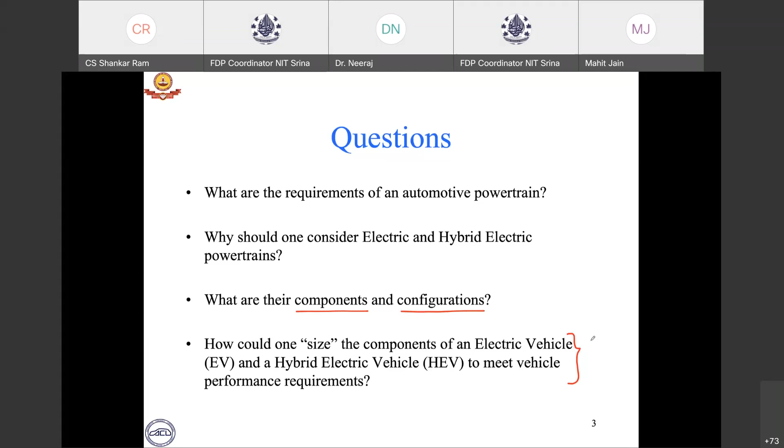So let's answer each question one by one, starting with what are the requirements of an automotive powertrain from a vehicle performance perspective. Many times, we encounter that when we have a vehicle, it goes from, let's say, 0 to 60 kilometers per hour in 4 seconds.

So please excuse my handwriting. I'm writing with a mouse. So please excuse if some words appear awkward.

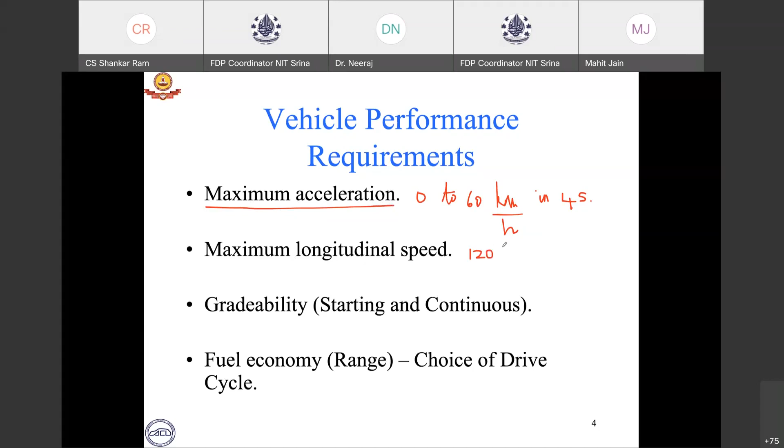So let's say we specify or we encounter that a vehicle goes from 0 to 60 kilometers per hour in 4 seconds. That means that we are specifying what is the intended acceleration of that. And one can also specify what is the peak longitudinal speed at which the vehicle should travel. So for example, one may say, I want the vehicle to travel at a maximum vehicle speed of 120 kilometers per hour. So that way I am putting a number to this requirement.

And we can also specify what is called gradability. I'm sure all of us would have driven on uphill roads, particularly if you consider NIT Srinagar, we will have a lot of hilly terrain in and around Srinagar. So then the question becomes, if I have to go up an upslope with an angle of theta, what effort should I put in to climb this slope? And that is quantified by what is called gradability. So gradability is typically tan of this theta, tan of this angle which I want to climb.

Of course, if we go in depth into this, we'll see that there is what is called starting gradability and continuous gradability. So what are they? If I look at continuous gradability, imagine that we are driving a car or a two-wheeler on a flat road, and I approach a hilly terrain or a flyover. I continue to go at the same speed on the flyover or the hilly terrain. So then I should put in some more effort or thrust to continue to go at that same speed. So that is what is called the continuous gradability requirement.

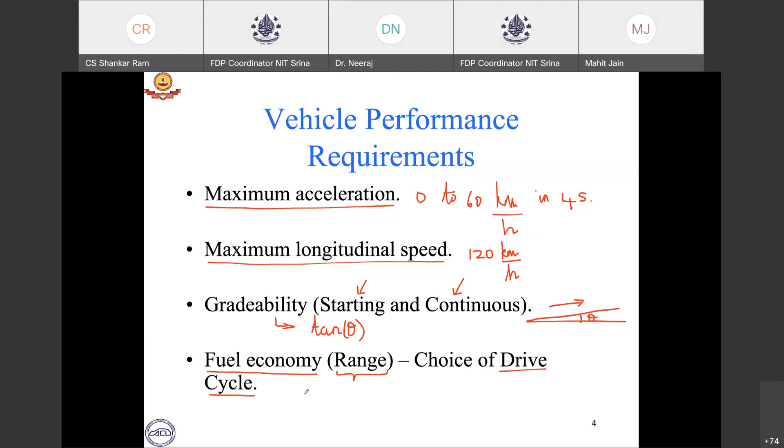So having looked at the main requirements expected of an electric or automotive powertrain in general, let's define some terms before we get into the configurations of electrified vehicles. The word powertrain is utilized to refer to what is called as a prime mover. Typically, we are aware of the internal combustion engine, the petrol engine or the diesel engine. In an electric vehicle, we have a traction motor, which is the prime mover. In a hybrid, we have a combination of internal combustion engine and electric motor that drives the vehicle.

So the powertrain includes the prime mover and also what is called as a drive line that finally transmits the energy from the prime mover to the wheels. The drive line consists of all the components from the prime mover output to the wheels. So if we remove the prime mover from the powertrain, whatever is left behind is the drive line. This may include the transmission or the gearbox, some other shafts like propeller shafts, a differential or a final drive unit, and then the driven wheels.

And the word transmission is typically used to refer to the primary gearbox, like which we use in an automobile. So you can see that transmission is a part of the drive line. Okay, so these are the three broad terms we will be using in this particular talk.

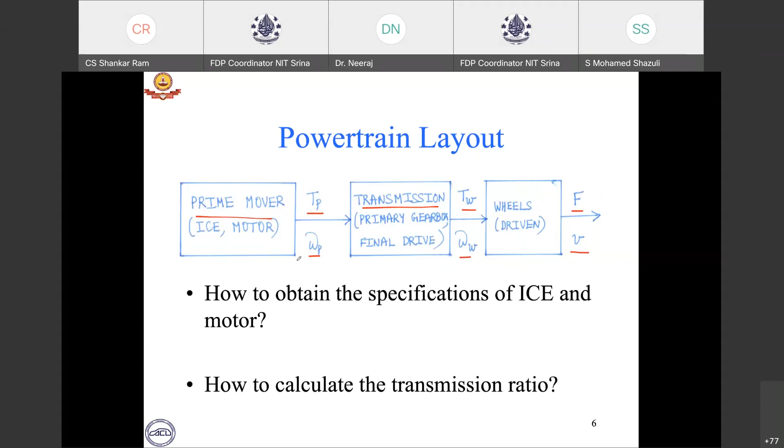So having established some broad questions, let's look at some details of electrified vehicles before we go into some dynamic analysis. At a very broad level, in the context of this program and talk, we can classify the automotive powertrain as the traditional or conventional internal combustion engine powertrain. We can also have electric powertrains, which are pure electric.

It can be just an electric motor driven by a battery, or an electric vehicle with what's called a range extender. We'll be looking at them shortly. It can also be a hybrid electric vehicle. In a hybrid electric vehicle, we have an engine and a motor which can essentially drive the vehicle, right? They can act as energy sources. So we can have different configurations. We'll be looking at all these shortly. We have series hybrids, parallel hybrids, and series parallel hybrids.

Now, in fact, if we look at the historical development of electric vehicles, we would see that electric vehicles were invented in the same timeline as IC engine powered vehicles, or in fact a little bit before them also, depending on our source. It's just that the internal combustion engine became very popular due to various reasons, and the environment was not suitable for the rapid development and acceptance of electrified vehicles.

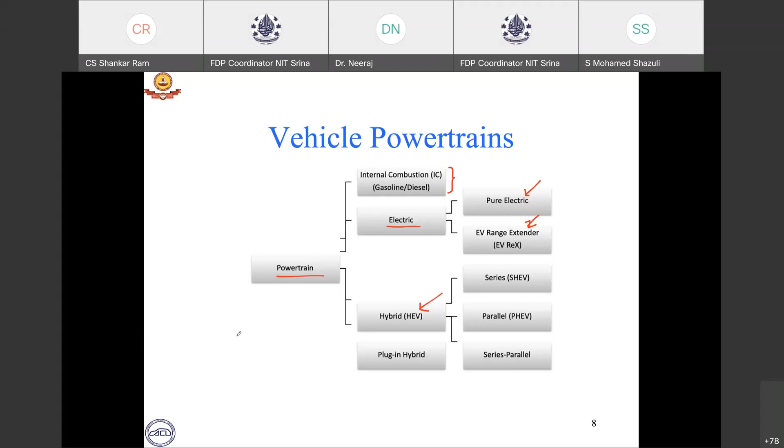So for the past 2 or 3 decades, you can see that hybrids and electrics have been making a comeback of sorts in the automotive domain. And currently, due to various reasons, they have been gaining more traction and acceptance, and they are going to become mainstream maybe within a few years, right? So let's look at some technological issues with the IC engine powertrain which an electric motor can address.

So all of us are aware of environmental reasons. Of course, one should take a very balanced view of these points, because in a pure electric, yes, we may not have tailpipe emissions, but it also depends on how the energy that is charging the battery is obtained. So we need to look at what are called well-to-wheel efficiencies and emissions in order to do a very balanced study. And we also have a shortage of fossil fuel in India, right?

As all of us know, we import our crude oil supplies. So availability of fuel is a constant question. The prices are also important, and we also have an increasing number of road vehicles operating. All these have motivated us to look at electric vehicles as a very serious option for practical usage. And if you look at an IC engine powertrain, its efficiency is pretty low when compared to electric vehicle powertrains. That is another reason which motivates us to look at it.

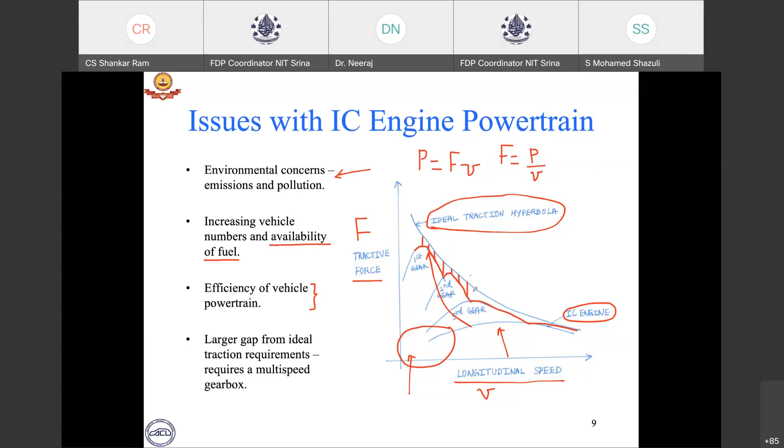So this is the science behind the multi-speed gearbox and how we switch gears as we drive the vehicle. But of course, there is always going to be some gap between the ideal traction hyperbola and what is actually obtained from the powertrain. So that is always going to be a challenge. But that's how the traditional IC engine powertrain operates.

With an electric motor, this issue can be addressed. In fact, you would have seen that in an electric car we can use one gear. So why is that? What characteristic of an electric motor facilitates that? We will look at that when we come to electric motor or electric powertrain sizing, shortly.

But please keep in mind the concepts of ideal traction hyperbola and what is an ideal powertrain. An ideal powertrain is one which provides a constant power output irrespective of the speed of the vehicle. Consequently, the force output from the powertrain should be inversely proportional to the speed, and there should be a hyperbolic relationship between the force and the speed. So that's an expectation.

So with this in mind, let's look at various configurations of electric vehicles. I'm going to explain these configurations using simple schematics. First, let's look at a pure electric vehicle. We have a battery, which provides energy to the electric motor, or what is called a traction motor. The electric motor is connected to a transmission, and through the transmission, it provides energy to the driven wheels. So this is a pure electric vehicle.

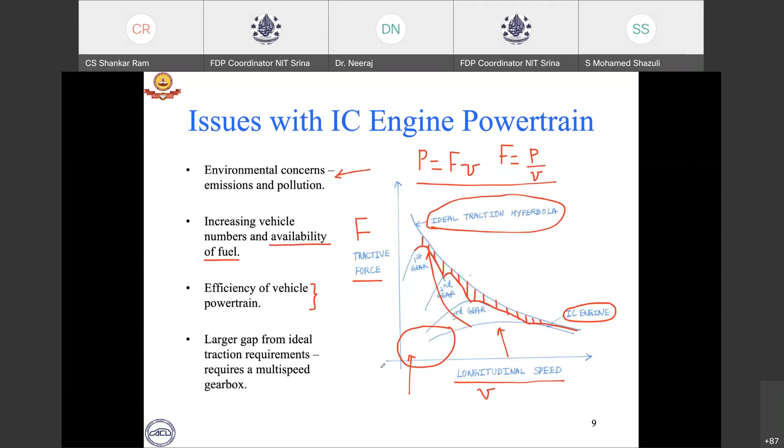Compared to the life of an automobile, the battery life is smaller, so we have to factor that in when looking at electric vehicles. Now, please look at what changed from the previous configuration to this configuration. You can immediately realize that I just added these two components, and that brings us to an electric vehicle with a range extender.

So what is this range extender? In an electric vehicle, suppose you are driving and the battery gets discharged, we stop, and we may get stuck, and we need to find a place to charge our battery, and also ensure that we spend sufficient time charging the battery.

On the other hand, we cannot afford, let's say, a few hours of charging time, right? What we do is that we use a range extender where a small engine is used and it drives a generator and it charges the battery as the vehicle is traveling. So yes, in this configuration, the engine is not used to drive the wheels. We should realize that it is rather used to charge the battery as the vehicle is in operation.

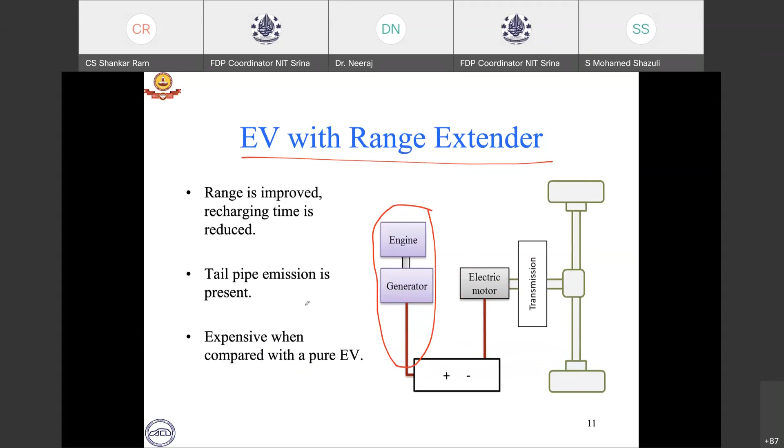But the engine is operated at its efficient points so that the tailpipe emission, although present, is minimized. And the size of the engine is also consequently lower because its only function is to charge the battery. So compared to a pure EV, it becomes a little bit more complex and it is costlier. But then there is a benefit, right? Because the battery can be charged while the vehicle is in operation. So that is the electric vehicle with range extender.

So now if you go to hybrid, we can immediately observe that the difference between the previous figure and this figure is this connection, right? In the previous figure, in the electric vehicle with range extender, the engine through a generator just charges the battery. In a series hybrid electric vehicle, the generator can charge the battery, and it can also drive the electric motor directly. So the engine can drive the vehicle through the generator, through the electric motor, through the transmission, and transmit energy to the wheels.

That's why it's called a series hybrid electric vehicle, because the engine and the electric motor are in a series connection, right? So the engine can do two roles. It can drive the wheels, or it can charge the battery, or it can do both. The electric motor can also independently take energy from the battery and drive the wheels, or it can take energy from the generator and drive the wheels.

So essentially, it is a very simple configuration of all the hybrid vehicle configurations. But the issue is that typically this electric motor is the only source for driving the wheels directly. So consequently, the rating of the traction motor is higher compared to other hybrid configurations. So that should be kept in mind.

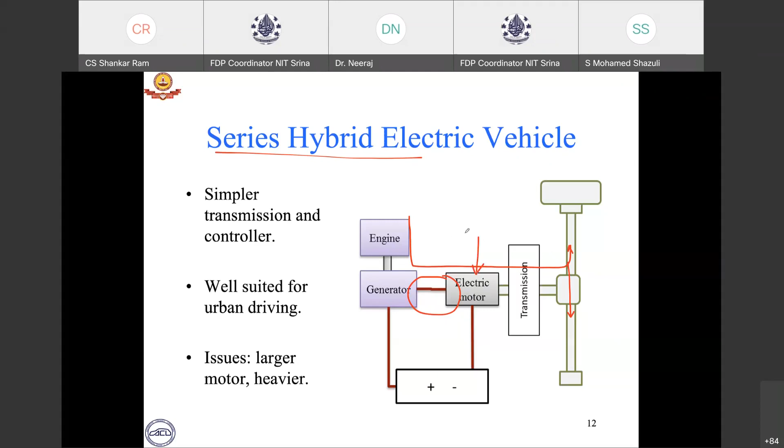So the next configuration is a series parallel hybrid. The main difference between the previous figure and this one is this, right? Now the engine can also charge the battery through a generator. That's why it's called a series parallel hybrid. So it sort of combines the attributes of both series hybrid and parallel hybrid.

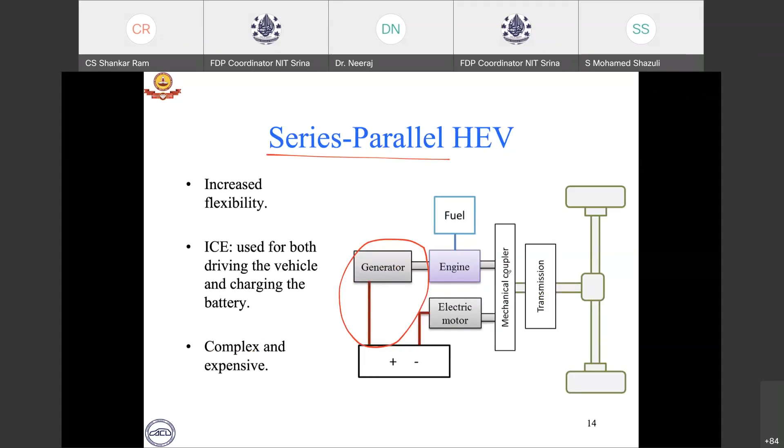So the engine can drive the wheels, the electric motor can drive the wheels, both can drive the wheels through the mechanical coupler at the same time, and also the engine can recharge the battery through the generator. So that is also possible. So that is the series parallel hybrid electric vehicle configuration.

So now we have asked ourselves some questions regarding the expectations of an automotive powertrain. We have also looked at various configurations of electrified powertrains. So now we will spend some time looking at what a powertrain needs to overcome, such that we figure out how we can calculate the tractive effort required from a powertrain. So let's spend some time to learn that.

I'm just going to use very simple mechanics to explain this. Let me explain this free body diagram which I have drawn here. Let us say we consider a vehicle which is traveling uphill on a gradient theta s. The weight of the vehicle is W. What is going to happen is that due to this grade, there is going to be a component W sine theta s down the grade, which the powertrain needs to overcome, and that W sine theta s is what is called grade resistance.

Okay, so grade resistance is mg sine theta s or W sine theta s. Okay, so that is the force or the component of the vehicle weight which the powertrain needs to overcome so that the vehicle can move up, right?

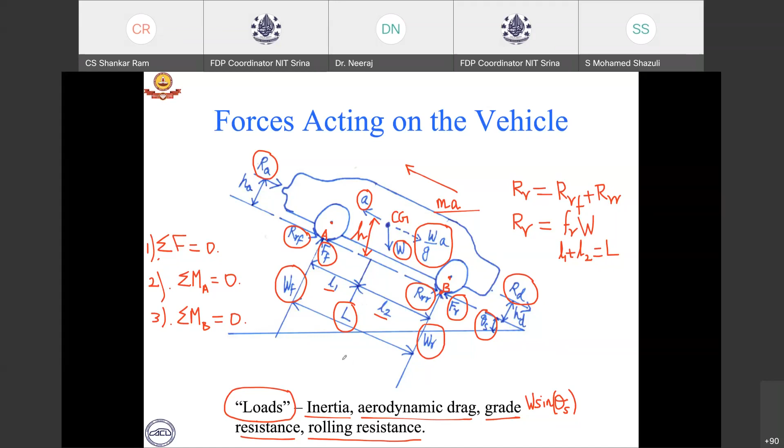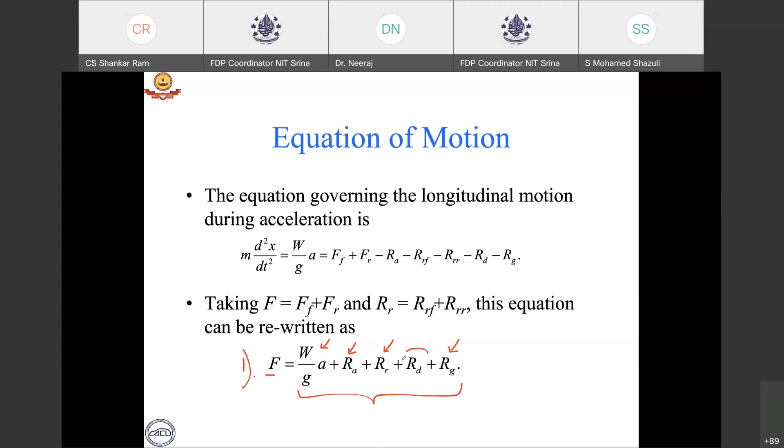So as we saw in the previous discussion, we use those three equations to write down the equation of motion. So this is equation 1, wherein we have summed all the forces and equated them to be 0. So consequently, the net tractive force is a sum of all these resistances. W by g is inertia. RA is aerodynamic drag. RR is rolling resistance. RG is grade resistance. And as I mentioned, some people will consider drawbar pull; some may not consider.

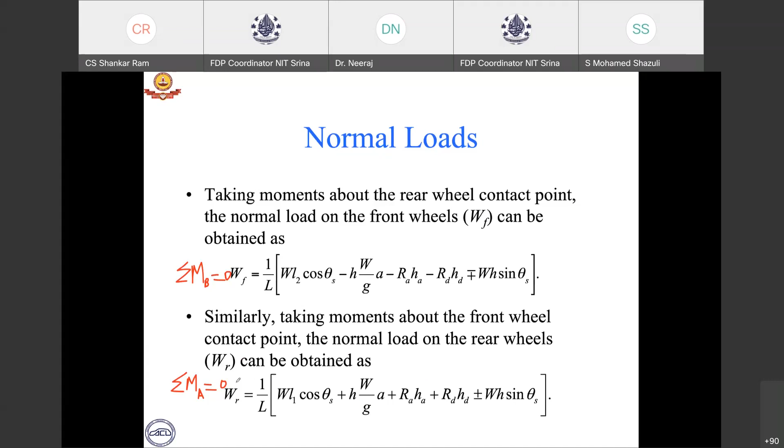And if we take moments about point B, we will get an equation for WF. So we get a summation of the moments about point B to be 0. This equation we get when we sum all the moments about point A to be 0. So the derivation of the equation is very simple. I leave it as an exercise to all the participants to do. You just need to look at the free body diagram and write down the moment balance.

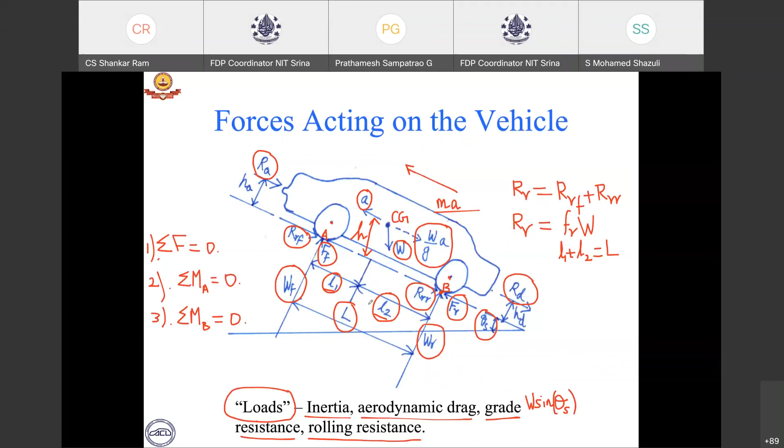So coming to this expression, we can see that L2 appears here in the front wheel drive expression. So obviously, if we drive the front wheel, we can get more out of the drive by using a front wheel drive. So that is the logic behind using the front wheel drive. Although there is a loss due to dynamic load transfer, so the denominator becomes higher in a front wheel drive, the fact that the center of gravity is closer to the front of the vehicle compensates for it.

On the other hand, if we take, let's say, a race car or a truck, typically the load is more on the back or the rear wheels. So consequently, L1 will be greater than L2, because now the center of gravity is more towards the rear. And added to the fact that there is benefit due to dynamic load transfer, more load is going to be transferred to the rear wheels during acceleration. So consequently, it makes sense to drive the rear wheels.

So I hope this discussion helped us to understand why we drive front wheels in some vehicle configurations and why we drive the rear wheels in some other vehicle configurations. So this is one of the reasons where we tend to balance out what is provided by the powertrain versus what is available in the tire road interface in terms of tractive performance to drive the vehicle.

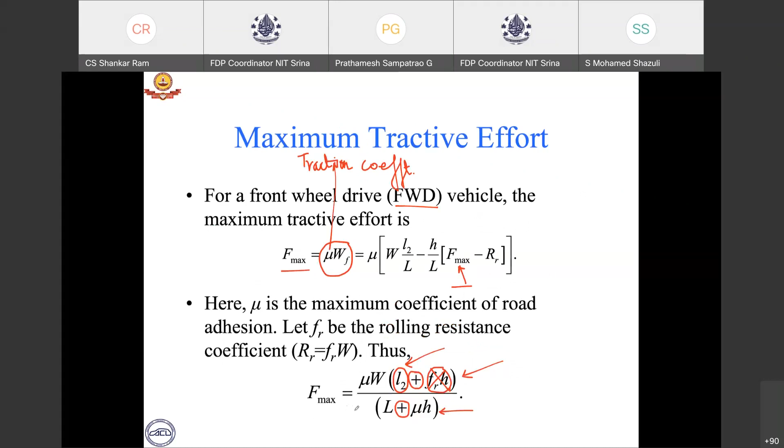So I'm going to give a couple of exercises to you. As I mentioned, please derive those equations. And I am also giving you 3 vehicles whose specifications are given here. I have given you all the parameters. Just calculate these numbers: Fmax for the front wheel drive and Fmax for the rear wheel drive. Observe by yourself which is greater, and then conclude which drive you will use, a front wheel drive or a rear wheel drive. So please do this exercise. It will be pretty instructive to do.

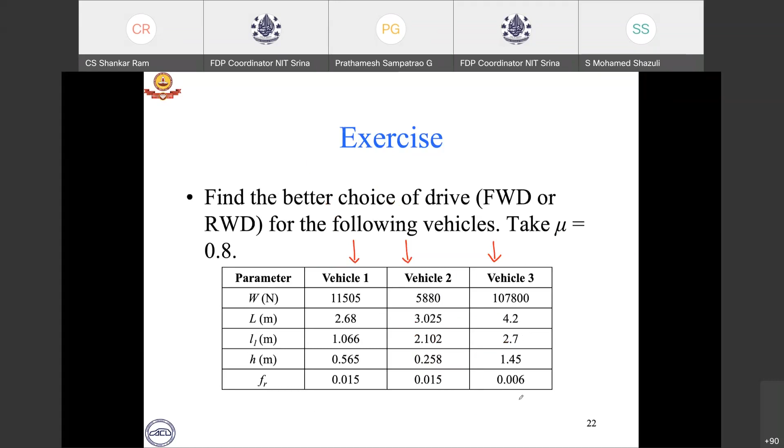All right. So having looked at all these configurations and some physics behind the vehicle tractive response, let's put everything together and let's try to size the electric powertrain. So now we are going to put all the information that we have learned till now, and then we will come up with very simple expressions to get what is called first level component sizing of an electric powertrain.

As we discussed, this is an ideal powertrain. I'm just recapping what we already discussed. An ideal powertrain should provide constant power and consequently a hyperbolic torque, right? Because please remember, P can also be written as T times omega. So this implies that T equals P by omega. So there is a hyperbolic relationship between the torque and the angular speed. So this is the ideal powertrain characteristics, but an IC engine provides characteristics like this, which is very far away from the ideal, right?

So consequently, we need to ask ourselves, what can we do? And typically, more torque is required in an ideal powertrain at the beginning because we need to start the vehicle from rest and we need to overcome inertia. And even when we want to overcome grade resistance, which is also a very significant resistive force, typically we drive most vehicles at low speeds on hilly terrain, right? So that's why we require more drive torque at low speeds.

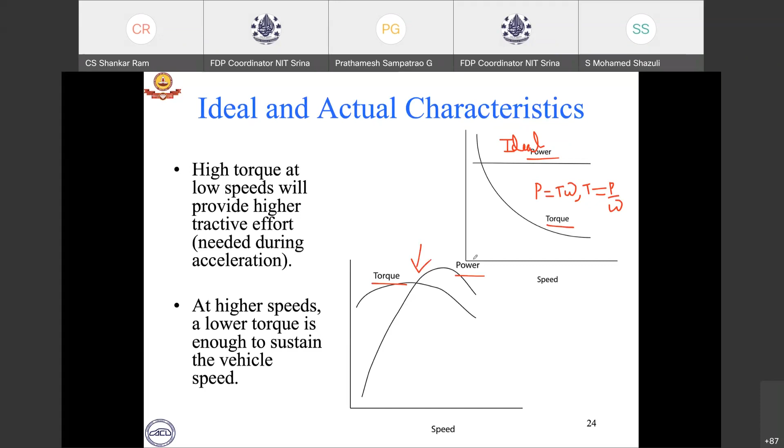On the other hand, if you look at an electric motor, once again, these are the ideal characteristics of an electric motor, but you can see that an electric motor, point number one, provides reasonably high torques at low speeds and zero speeds. In fact, it provides very high torques. And the power keeps on increasing till what is called the base speed. After the base speed of a motor, the power remains constant, whereas the torque starts falling like a hyperbola.

So we can immediately observe that the electric motor has characteristics more closely aligned to the ideal traction hyperbola, what is expected from a powertrain, than the IC engine. So consequently, this becomes very attractive for us to use, because the electric motor is going to take us closer to the ideal traction requirements. And consequently we can use maybe one gear itself in an electric powertrain rather than multiple gears. So this is a very attractive feature of an electric motor.

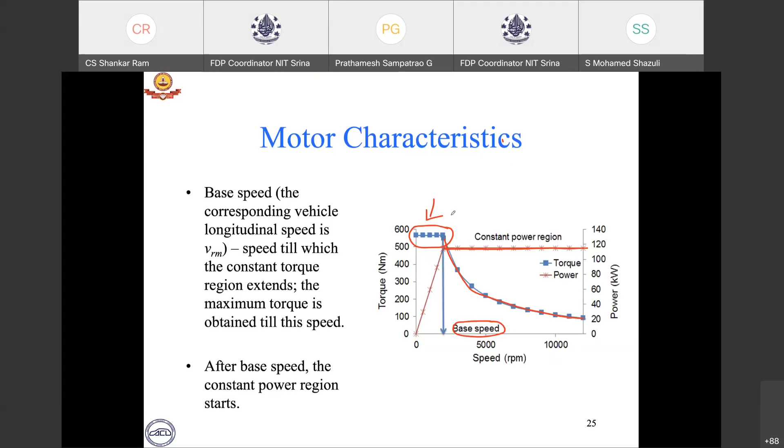And also the electric motor can give high torques at low speeds, so starting a vehicle becomes easier. It becomes much easier to operate, and consequently, we would have observed that electric vehicles also can accelerate faster. Due to this reason, this makes it very attractive. So consequently, let's see how we can get a relationship.

Suppose we want some traction force F max from the vehicle. This is the force at the wheel, and this is the radius of the wheel. We multiply the force and the radius, and we get a torque. Then we divide the torque by the transmission ratio IG. Then we get the torque that should be provided by the prime mover. But of course, there is some energy loss in the entire system, so we divide that number by the transmission efficiency eta T. Then we get the torque that the prime mover should provide.

So essentially, this expression gives us a relationship between the torque that should be provided by the prime mover and the force that will be delivered at the tire-road interface. So once again, we have a longitudinal force at the tire-road interface. We multiply by a radius, we get a torque. We divide by the gear ratio, or the transmission ratio, and then we also divide by the transmission efficiency. That tells us the torque which the prime mover should provide to achieve that desired force.

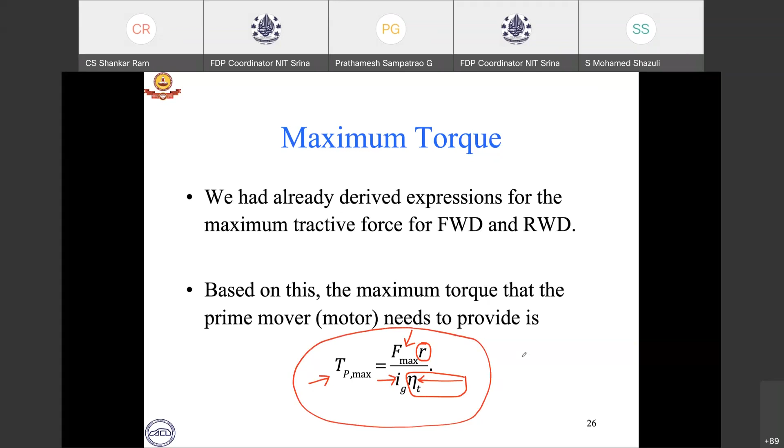Now let's look at each criterion one by one. So I go back to our very first question. We asked ourselves, what were our expectations from an electric powertrain? One expectation was a maximum speed. One can specify that I want my vehicle to go at a maximum speed of, let's say, 120 kilometers per hour. So then what do we do? If that is an expectation, let us say we want our vehicle to go at a speed of Vmax.

Now, when we are going at maximum longitudinal speeds, if you recall the loads, inertia, rolling resistance, grade resistance, and aerodynamic drag, inertia and grade resistance will not be major contributors. The reason being that when we are going at maximum longitudinal speed, we typically go at a cruising speed on a flat road, or a near flat road. So that's when we want to achieve maximum speed.

So then in those conditions, the inertia force will be very small, and so will be the grade resistance. So the dominant forces will be the rolling resistance and aerodynamic drag. So this is the force which the prime mover has to overcome. We multiply with the maximum speed, divide by the powertrain efficiency, or the transmission efficiency, and we get the power which the prime mover should provide. And we can also calculate the torque from the expression that we wrote down in the previous slide. Okay? So that's how we get it.

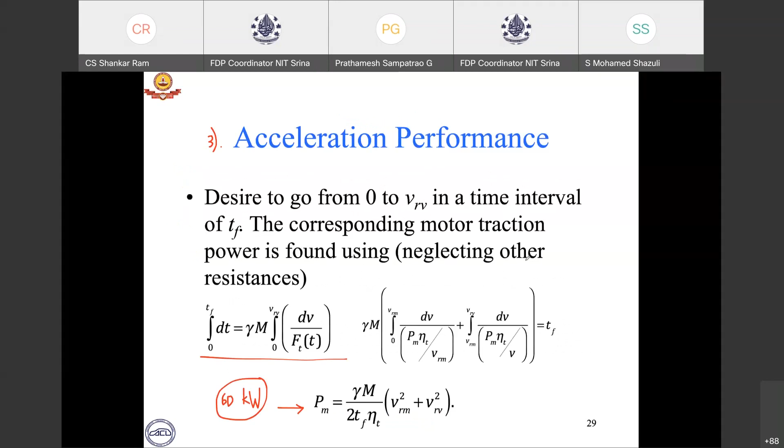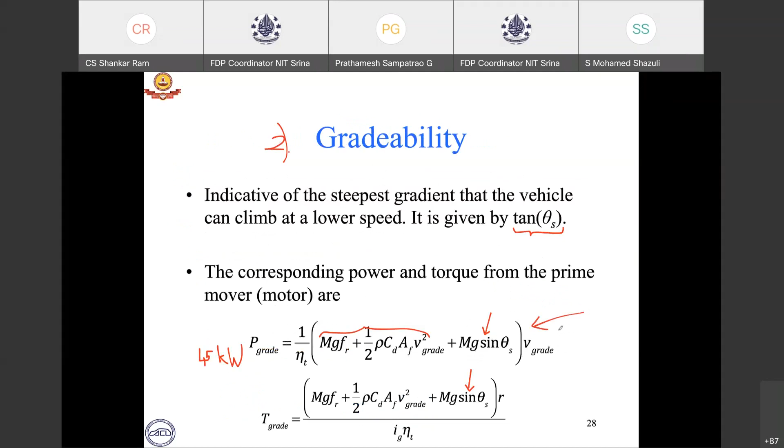The second question is the power required for climbing a grade of 15% at 16 kilometers per hour. If someone says gradeability is 15%, that means tan of theta s is 0.15, so you need to take tan inverse of 0.15 to get theta s. Please be aware of that; that's how you should interpret it. Go back to the formula we had for gradeability, substitute it, and get the power required for meeting the gradeability. Then, the transmission ratio for achieving a maximum vehicle speed of 90 kilometers per hour at a motor speed of 12,000 RPM.

What you do is you go back and look at this expression. You just substitute, and then you need to find IG. So please try out these exercises so that you will gain some insight behind these equations, and you will also have a feel for the numbers, which is also very important.

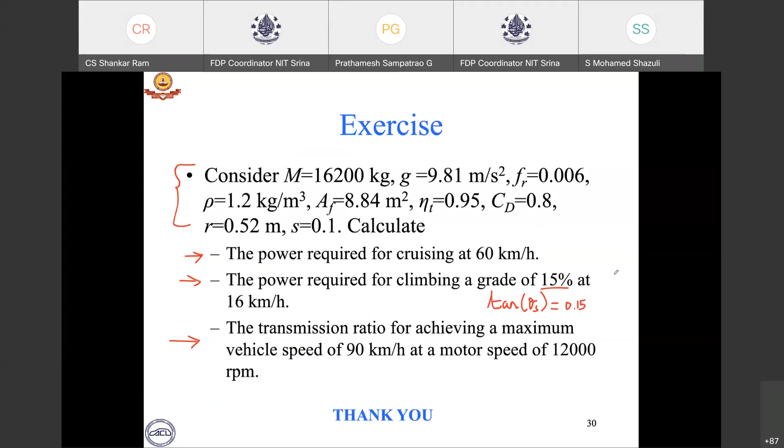So let me stop here. This is what I have to convey to you today. In summary, we looked at some basic questions related to vehicle power, electric powertrains, and powertrains in general. From the perspective of vehicle dynamics, we asked ourselves what are the requirements of a powertrain, and what are the different configurations of electrified vehicles, and we did some simple analysis to get the relationships between various quantities involved, and then we used them to size electrified powertrains.